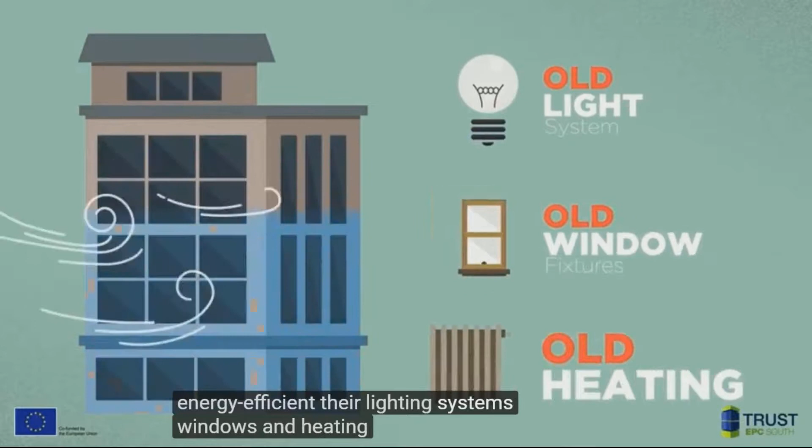In Europe, and in particular in the Mediterranean area, there are many buildings used by the tertiary sector. However, at present, the majority of these buildings are old and not energy efficient. Their lighting systems, windows, and heating and water systems are obsolete and therefore not performing well. These factors bring heightened maintenance costs and lowered rental incomes.

Various parties are traditionally interested in these obsolete buildings since they see in them a good investment potential and business opportunity: asset owners or investment managers and financial institutions. However, these actors have to face several problems in order to understand how to evaluate the investment. The asset owners do not have instruments, knowledge, or capacity to perform an efficient and effective first assessment of these buildings. In addition, they have problems in finding appropriate financing or common technical standards to refer to.

Finance providers, instead, have difficulties in estimating the technical and performance risks of complex investments in this context. Furthermore, they seem not to be ready to meet the new energy efficiency services market because they consider it not mature enough to be profitable.

The solution to all these problems is the Green Rating for Energy Performance Contracts, or GREPCON, a service that provides a standardized and independently verified approach to identification and quantification of energy-saving measures for tertiary sector buildings. This, together with further technical and financial calculations, allows for providing comparable evaluations trusted by the market and financial institutions.

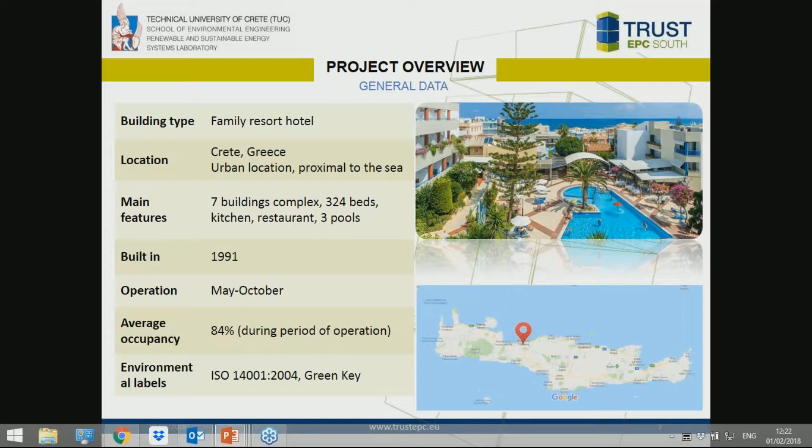More particularly, this family resort hotel is located on the island of Crete in Greece, in an urban location, but proximal to the sea. It is a 7 buildings complex with a capacity of 324 beds. It includes additional facilities such as kitchen, restaurant, and swimming pools. The hotel was built in the beginning of the 90s and operates seasonally since then, from May till October. The average occupancy during the period of operation is 84%. It is worth mentioning that the hotel already has an environmental policy in place, and this made it easier to engage it in the project works.

You can see here the key steps of the methodology we followed. The first step was to perform a detailed energy audit in the building in order to collect building plans and data about the building envelope, energy and water bills, operational data, and as well to perform an equipment inventory. And during this phase, we had a close cooperation with the owners, and interviews were held for defining priorities, specific needs, and discussing energy-saving interventions with them.

In the second phase, we performed a dynamic thermal simulation of the building in order to validate the building construction and details of fabrics used to set up the thermal model. Finally, we applied GrepCon to calculate the energy breakdown, the savings achieved by standardized measures applied, and eventually to perform the financial assessment. The final output we get is a feasibility rating potential for an energy performance contract.

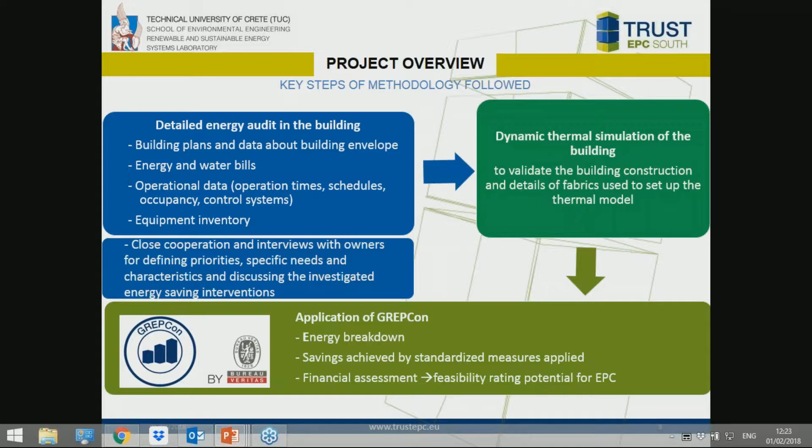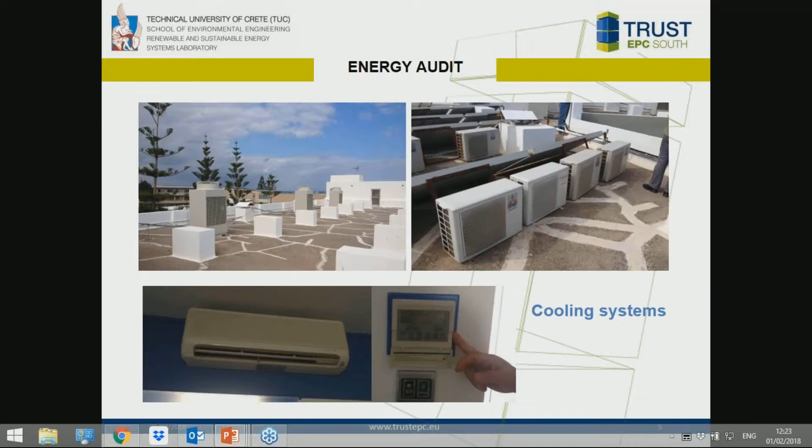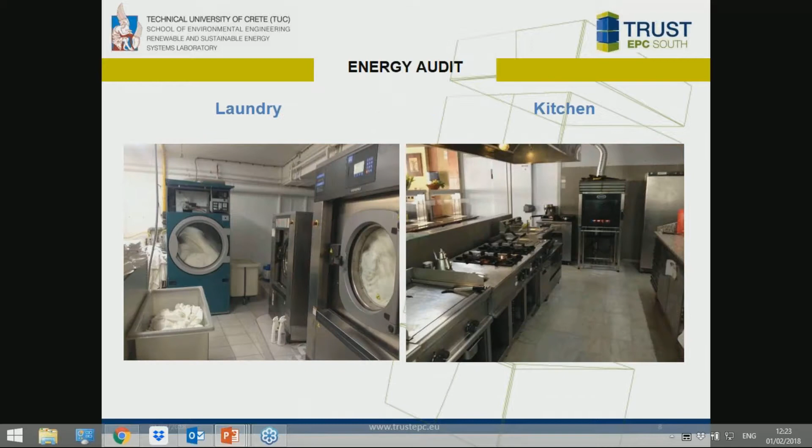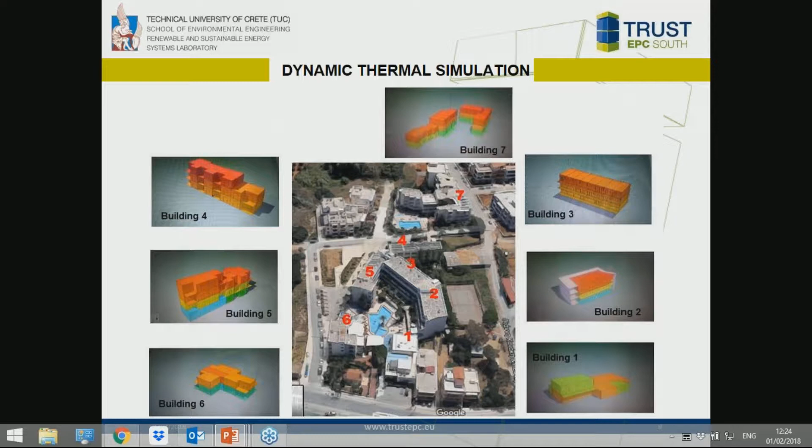You can see here photos from the energy audit performed in the hotel. We collected data on the building envelope, on the cooling systems, domestic hot water systems. You can see here the solar thermal panels used for the hot water, lighting systems, and last but not least, laundry and kitchen facilities. In the second phase, as we mentioned previously, we performed the dynamic thermal simulation of the whole building complex. As you can see here, some pictures.

For this project, 3 technical scenarios were discussed with the hotel owners and were assessed with GrepCon. For each of these technical scenarios, we assessed 2 financial energy performance contract scenarios, and that is a total of 6 scenarios. In financial scenario A, 60% loan and 40% own financing were assumed, whereas in financial scenario B, a percentage for grant was also taken into account.

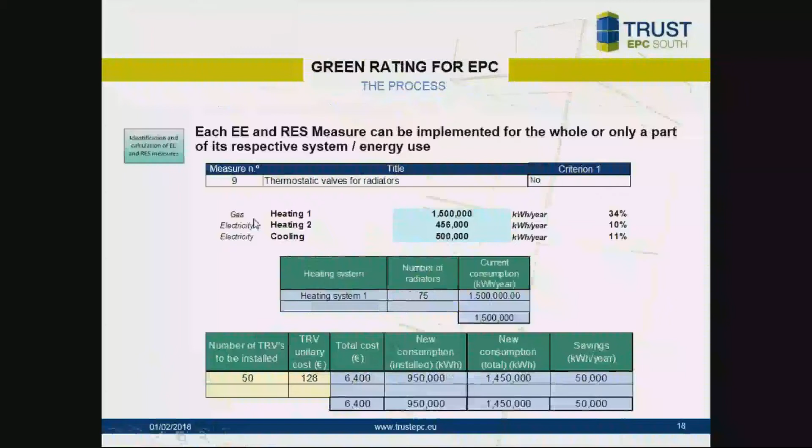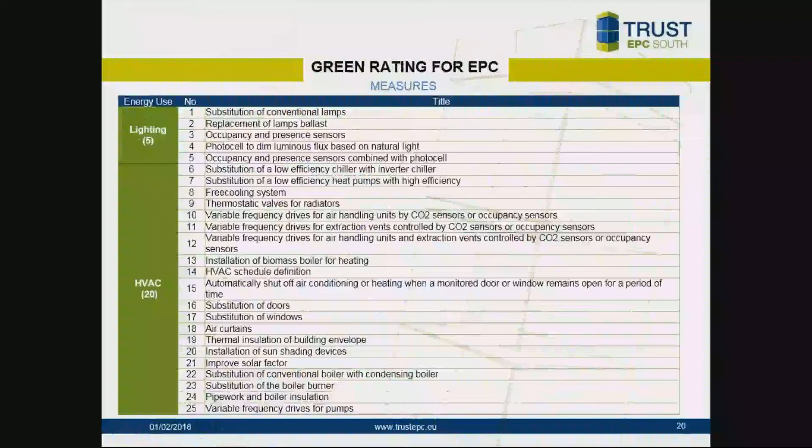Also, the measure can be implemented for the whole or only part of the respective system. I mean that it could be implemented on only one floor of the building, according to the auditor's experience. And finally, the measure calculation is based on data provided by the auditor in terms of economic impact. I mean, the price of the device or the equipment is a decision of the auditor according to the market. Okay, slide number 20.

There is a list with all the measures that the tool is able to provide. In total, we have 47 measures: 5 for lighting, 20 for heating, ventilation, and air conditioning, 8 for hot water, 6 for renewable energy sources, and the rest are for the other requirements or related to improving power factor or electricity in the building.